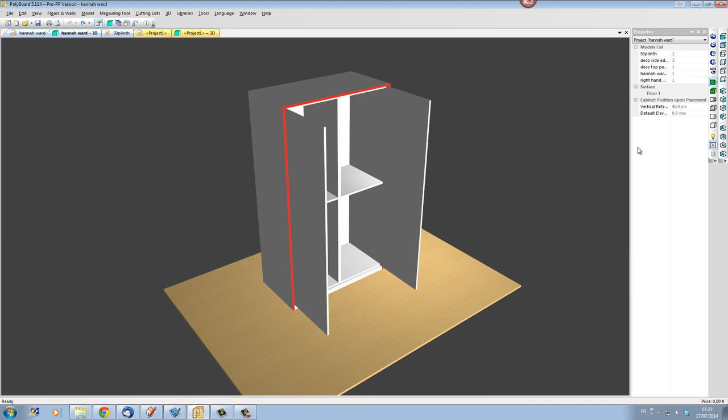This is a problem sent to me by Terry on the forum. Terry is building a modular project with cabinets, built up of cabinets clipped together, a kick frame underneath the cabinets, and decorative side panels and top panels. If we look into this project in X-ray view, we can see the different parts: a kick frame underneath, two modular cabinets clipped together, and decorative panels all the way around.

One of the problems we have to deal with in this type of project is how to clip the different elements together.

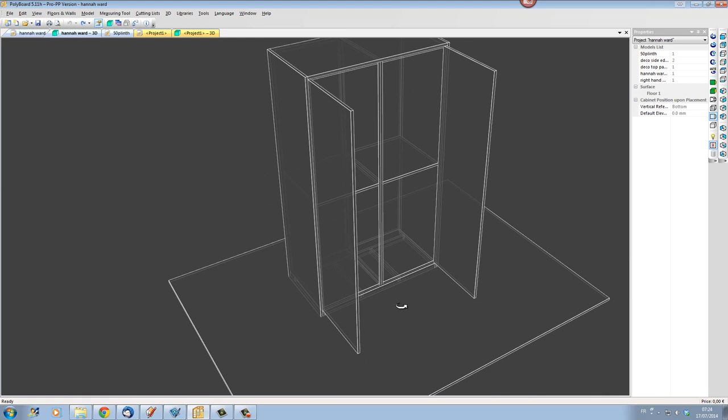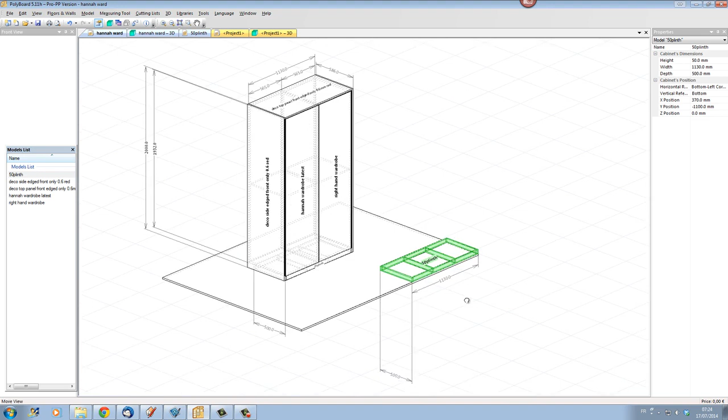If we look at the project in edit mode, we can see the different elements on the left hand side, including the 50mm kick frame. If I drag a kick frame onto my project and clip a wardrobe element onto it, snapping this wardrobe element onto my kick frame, we can see the problem: the wardrobe is snapping onto the outside of the kick frame, which is not exactly what we want.

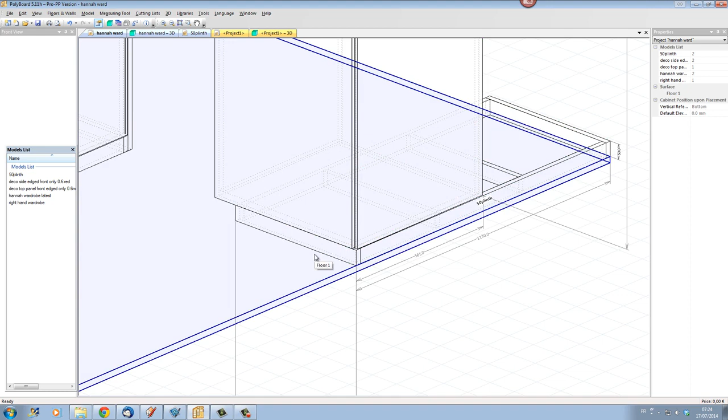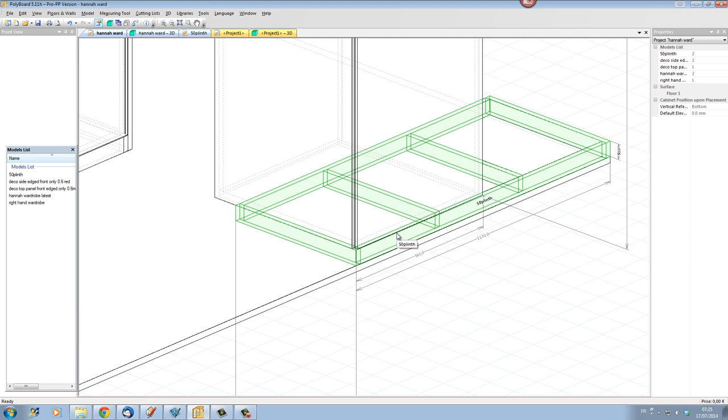What we really want is for the wardrobe to snap onto the kick frame with an overlap all the way around. So how do we create a kick frame that will enable us to simply clip our different wardrobe elements onto it and have an overlap all around? I'm going to show you how to do that.

Let's start a completely new project, and I'll show you quickly how to do that. So we go into Polyboard, new project, and this is an empty project, and let's put onto our empty project a new cabinet.

This is our model cabinet, and let's create with this model cabinet a kick frame that will enable us to clip onto it other elements, but those elements will clip onto it with overlapping the kick frame at a certain distance.

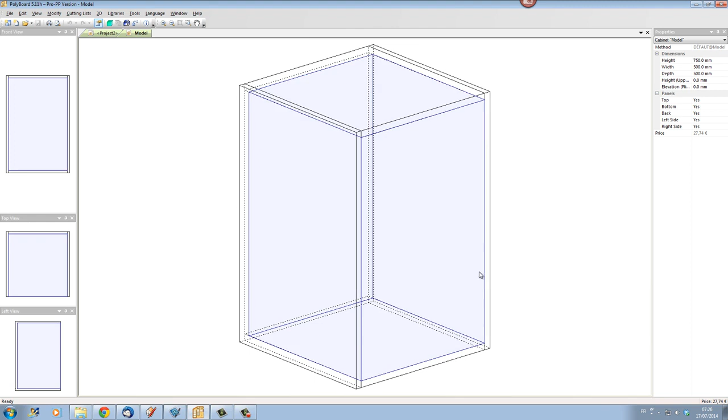The first thing we're going to do is make sure we don't want all these panels on the outside of our cabinet, because Polyboard always clips cabinets one onto the other from the outside volume. So what we want to do is create the kick frame inside the total volume of the cabinet, so that the total volume of the cabinet is actually overlapping the kick frame by a certain distance. So we don't want to use the outside panels.

So first we're going to get rid of every panel that makes up this cabinet, so that we only have a virtual cabinet. I'd go into my properties and click no on all its panels, and now all we have here is a virtual cabinet with no panels.

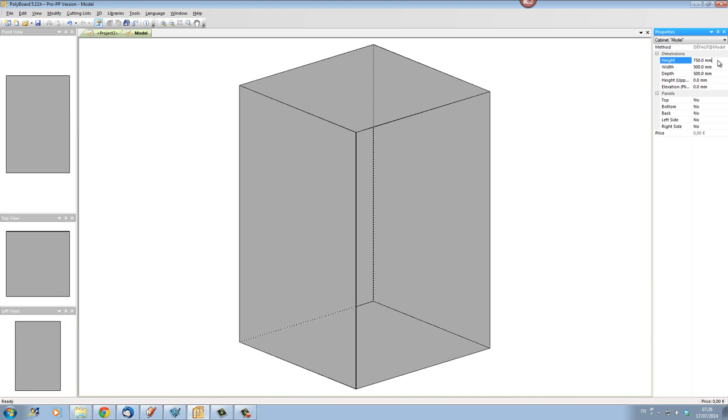This virtual cabinet, I'm going to give it a height of my kick frame, so let's say 50mm high, and a width which is going to be the length of my kick frame, let's give it a 1m20 width. So we now have a virtual volume, this kick frame 50mm high. The outside dimensions are not important.

What we're trying to do here is make a parametric kick frame, so that every time we clip onto it and assemble another element, that element will snap on leaving an overlap. So how do we do this? Well, the first thing we do is use this volume to create the kick frame inside the volume. Here we have the volume of our cabinet.

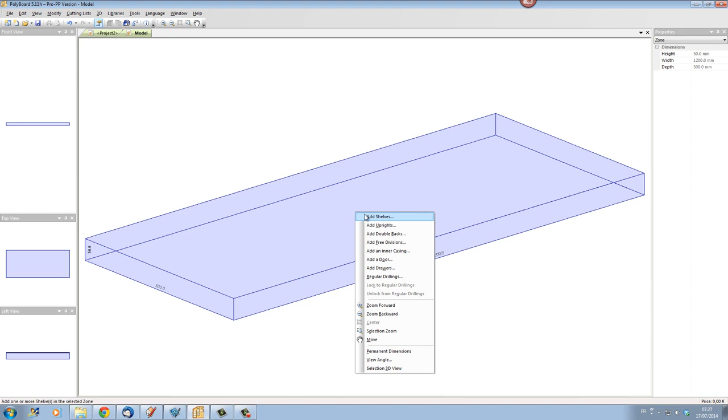Let's first put in a couple of uprights inside this volume. Let's put the first upright a distance from the left, say we want our kick frame set back from the outside of our cabinet by 40 mil. So the distance from the left is 40 mil, and I'll click OK. Polyboard has put in here, 40 millimeters from the outside volume, the first element of our kick frame.

We go into this volume here and do the same thing, an upright, this time from the right hand side, 40 mil. Notice you're putting in 40 mil, but it could be any distance you want, and this element will always be at that 40 millimeters from the outside of my cabinet.

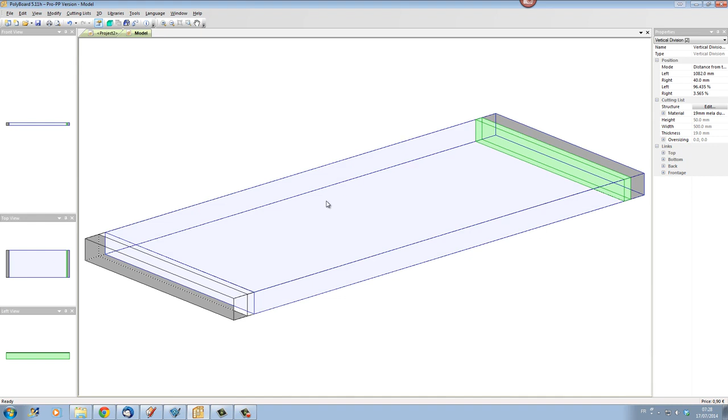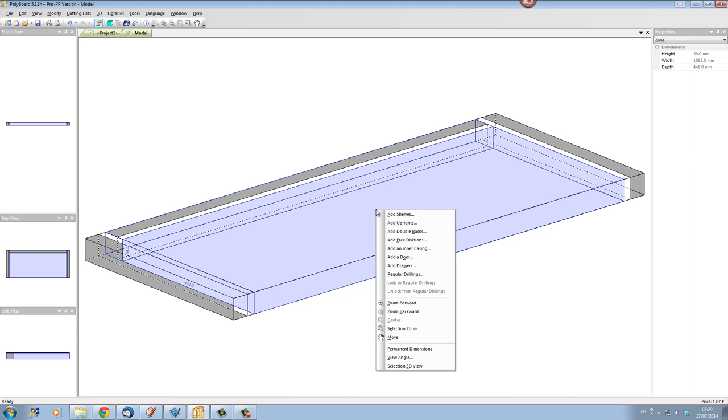Now let's put in the front and back. Let's go in here and click double back, and the distance from the back we're going to put 40 millimeters here as well. Polyboard has put in a double back at 40 millimeters from the back of the total volume of the cabinet. Go into this volume here and click double back, and this time distance from the front 40 mil, and we have 40 mil here.

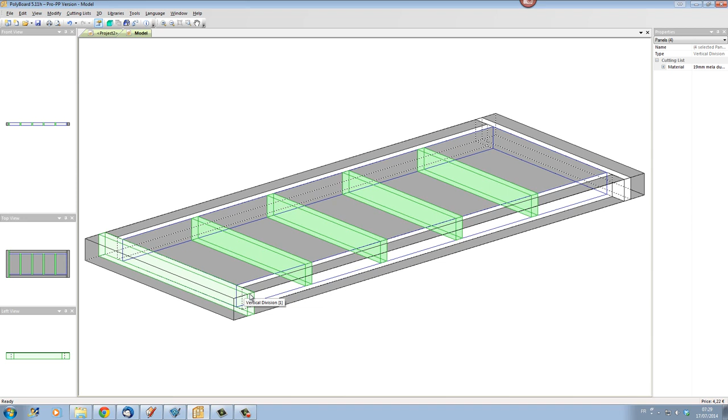Let's put in this interior volume now a series of uprights, let's put 4 uprights as stiffeners along our kick frame. Now the kick frame is actually set up, but we have a little problem: the sides of our kick frame, or the ends of our kick frame, are overlapping by 40 mil, but we don't want that.

So let's go click on one of the sides and click on the link to the back and recess it by 40 mil, and do the same from the front, recess it by 40 mil. Do the same for the other side here. From the back, recess 40 mil, and from the front, recess 40 mil. And now we have our kick frame.

Let's have a look at our kick frame. We have our kick frame which is set up. That's fine.

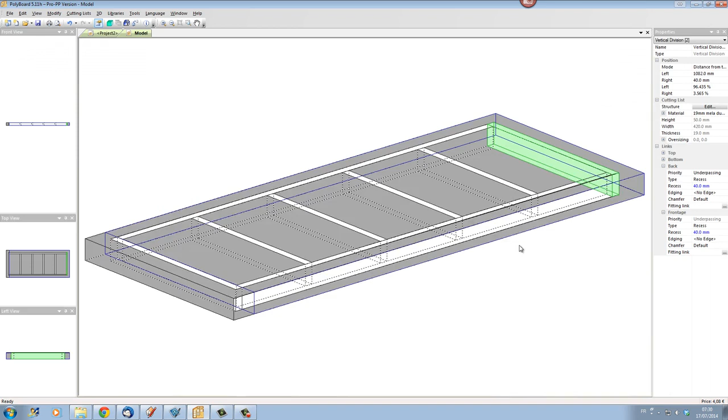Now let's click close and create a new model in our project and call it a kick frame. I'm going to call it kick frame R40, recessed by 40 millimeters. Now the kick frame appears in my models list, kick frame R40, and I can drag it onto my project.

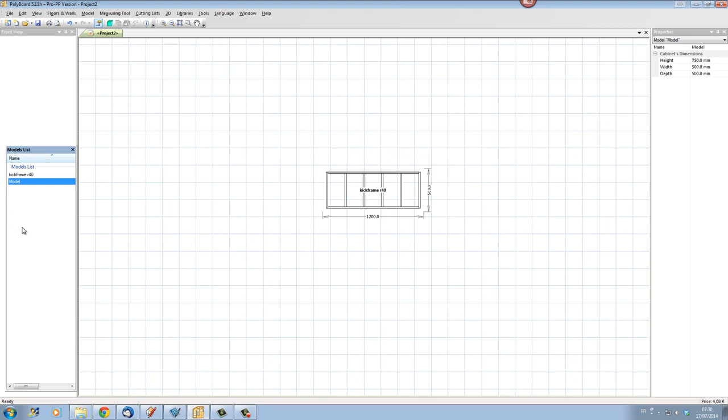And now when I take a model, any other cabinet, an ordinary cabinet, look, it's actually clipping where the clip points are, is now at the exterior of my cabinet. And if I drag it here, we can see that the actual cabinet is overlapping the kick frame by 40 mil here.

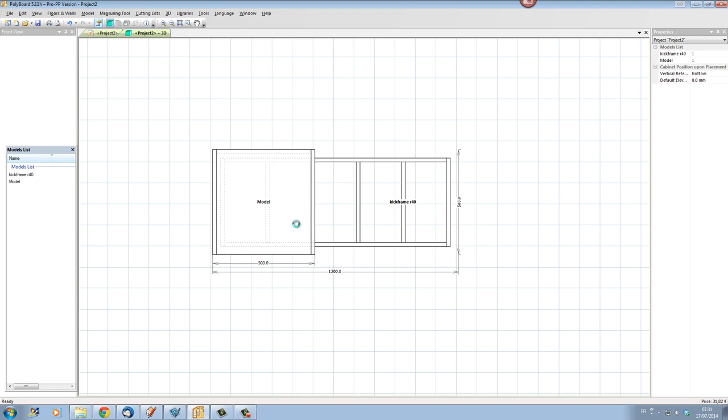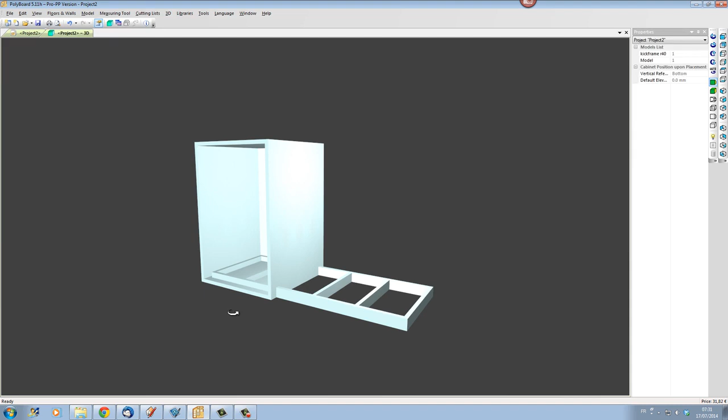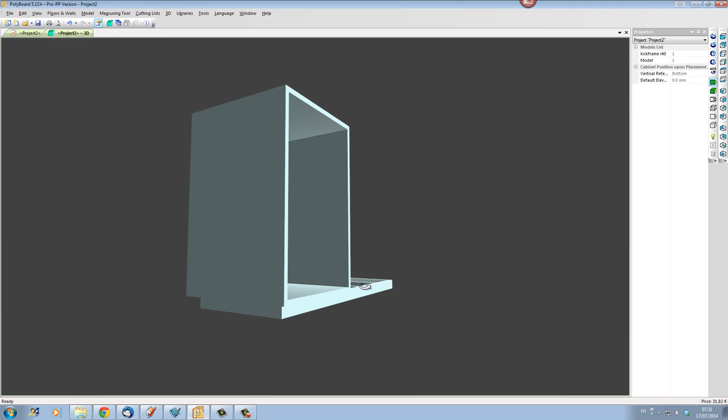So, this is easy to fix: move the cabinet. We can select the cabinet and say Z position here, and let's put it up 50. Now we've moved the cabinet up 50 millimeters, which is the height of the kick frame, and it's naturally sitting on top of the kick frame, which is one solution.

Another solution would be, let's get rid of this cabinet. Another solution would be to take the model, and instead of having the model with its Z outside position at the bottom here, at Z0, if we take this particular model and give it a plinth elevation in its properties here, and we add 50 mil, the total height of the cabinet is still going from here to the top of the cabinet, but we have a virtual space underneath, which is the space of the kick frame.

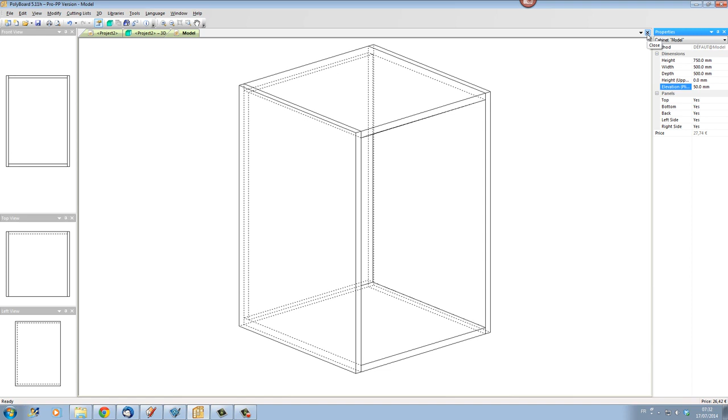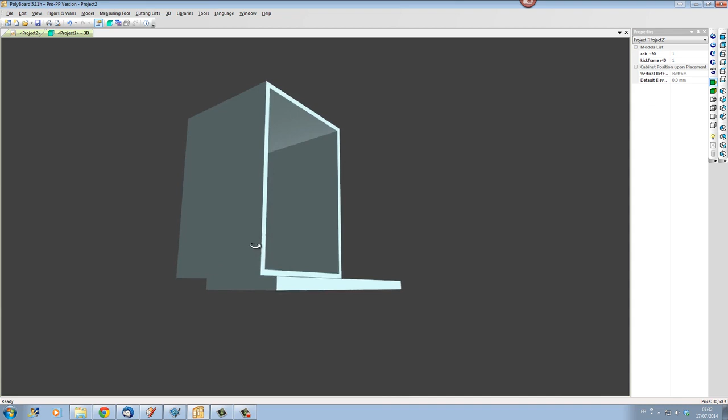Now, if I take this cabinet and create a new model, let's call it cab plus 50. So it's a cabinet with a 50 millimeter plinth. And now my cab plus 50s, if I clip them onto the kick frame here and we look in 3D, they come in automatically snapped on top of my kick frame.

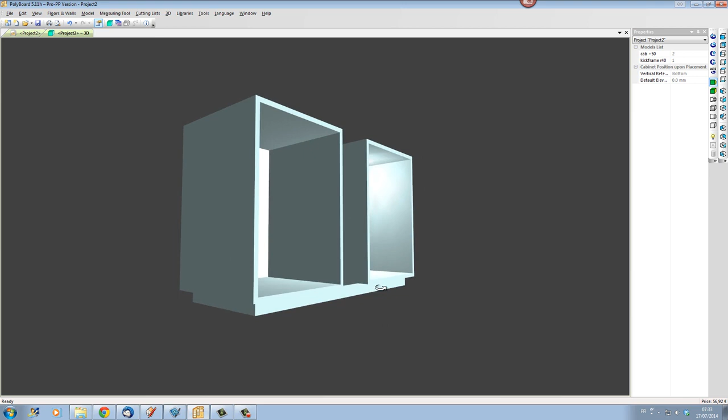Let's snap it up to the right position, and let's snap another one on here, and let's see what we have in 3D. Now the cabinets are actually coming in clipped on top of my kick frame, and they are overlapping the kick frame by 40mm all the way around.

So that is how you set up the kick frame so that when you clip your cabinets onto your kick frame, you will always have a consistent recess of the kick frame, and the cabinets will always overlap the same amount of your kick frame once clipped into place.